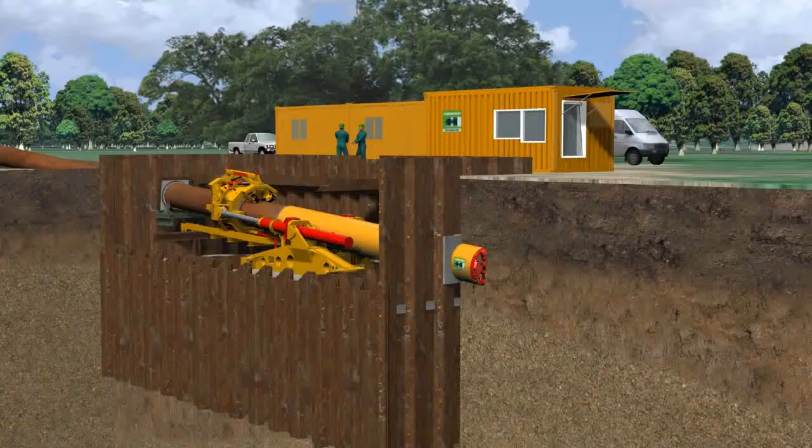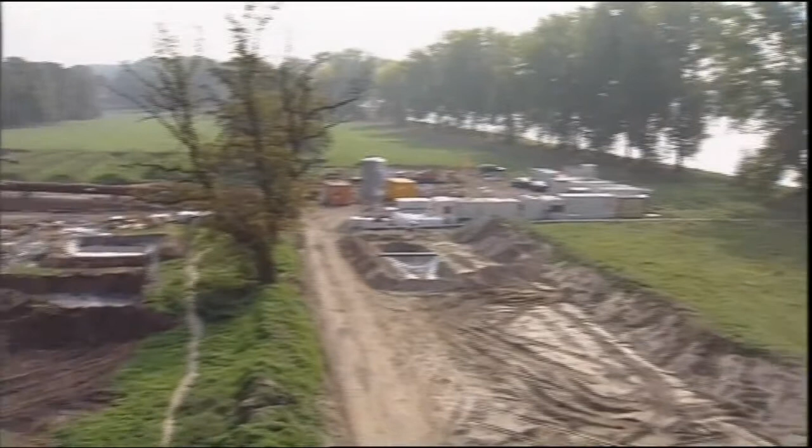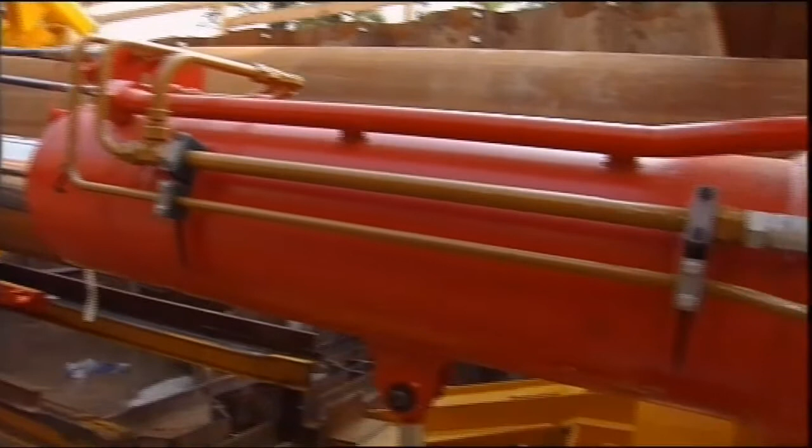Herrenknecht's direct pipe technology is a newly developed method for the direct installation of prefabricated pipelines, combining elements and advantages of both well-established techniques, microtunneling and horizontal directional drilling. This innovative technology is designed for laying pipelines in all geologies.

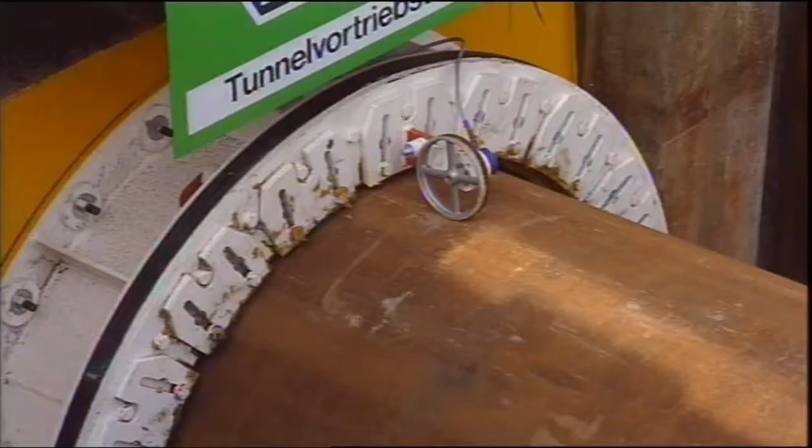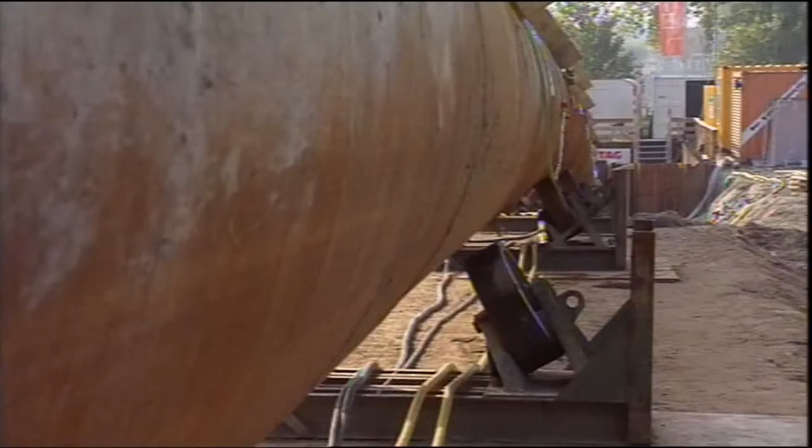With the new direct pipe method, developed by Herrenknecht, drilling of the borehole and the installation of the pipeline are generally carried out in one step. The pipeline is welded together and tested on site, and thereafter thrusted in its whole length with the aid of the pipe thruster.

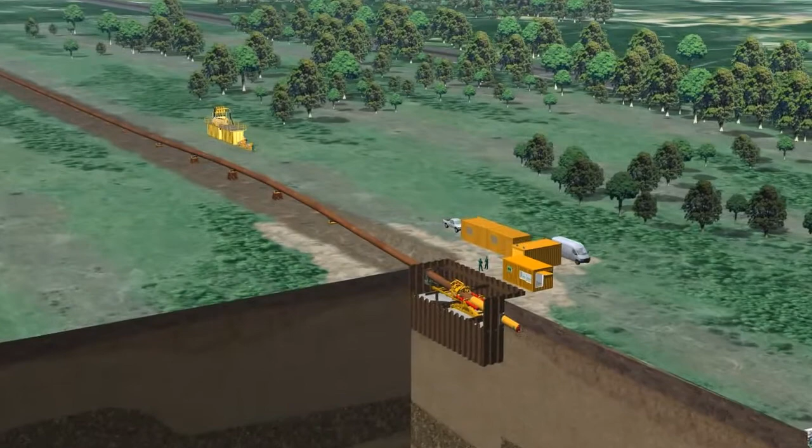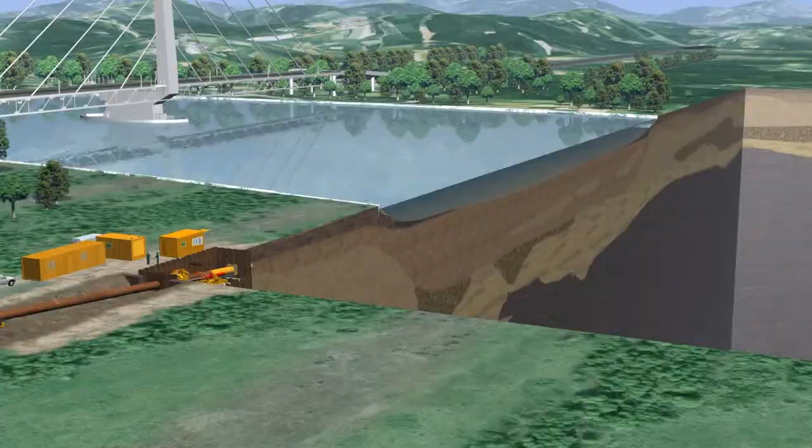The following computer animation shows the principal working method and the main components of the direct pipe method, starting with the setup of the launch pit. The pipe thruster is installed in the launch pit, where it is fixed horizontally and vertically onto sheet piles and anchors. If necessary, inflow of groundwater and river water is prevented with a special launch seal.

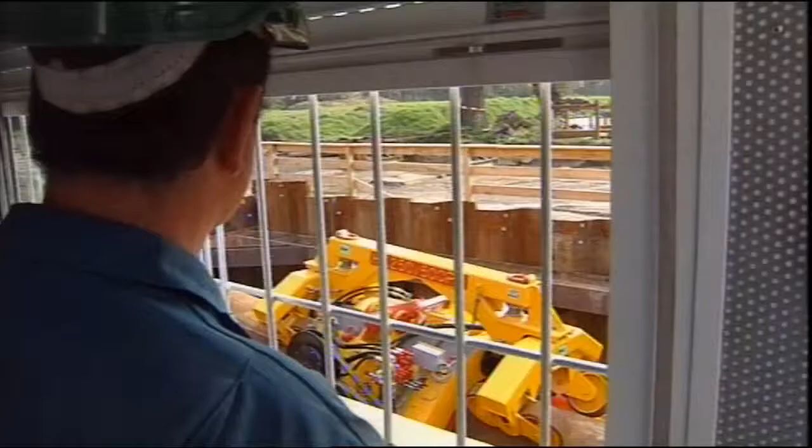The control container is installed next to the launch pit. From there, the operator is able to monitor the pipe moving forward. Additional containers for the preparation and separation of the slurry bentonite are installed in the middle of the prefabricated pipeline.

According to its elastic bending radius, the pipeline is laid on rollers for easy moving to the launch pit. The pipeline is welded to the rear end of the direct pipe machine. Once started, the machine is pushed through the launch seal and starts to excavate the planned alignment. The pipe thruster pushes both the pipeline and the direct pipe machine. It replaces the jacking frame, which is used for standard microtunneling purposes.

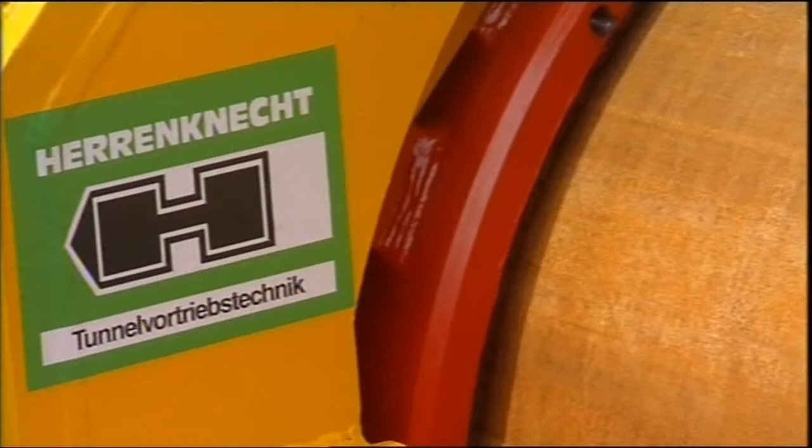After the completion of each 5-meter stroke, the clamping inserts are reopened and the 2 cylinders are hydraulically retracted. The whole excavation and thrust process starts again, and the pipeline is advanced cycle by cycle. The 4 clamping inserts of the clamping unit, which are lined with vulcanized rubber, grip the pipeline and thrust it stroke by stroke into the ground.

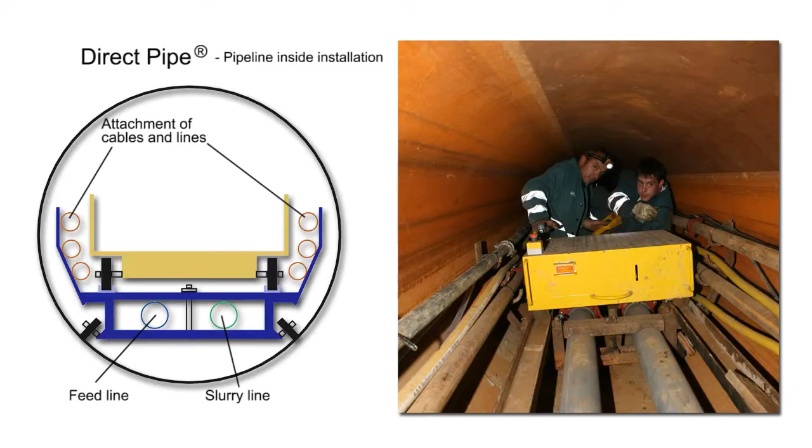All bentonite lubrication and soil conveying lines, as well as power supply and navigation cables, are installed inside the pipeline. The direct pipe machine drills along the predetermined alignment below the riverbed. The pushing force required for the drilling operation is transferred to the cutting head by the pipe thruster via the entire pipeline.

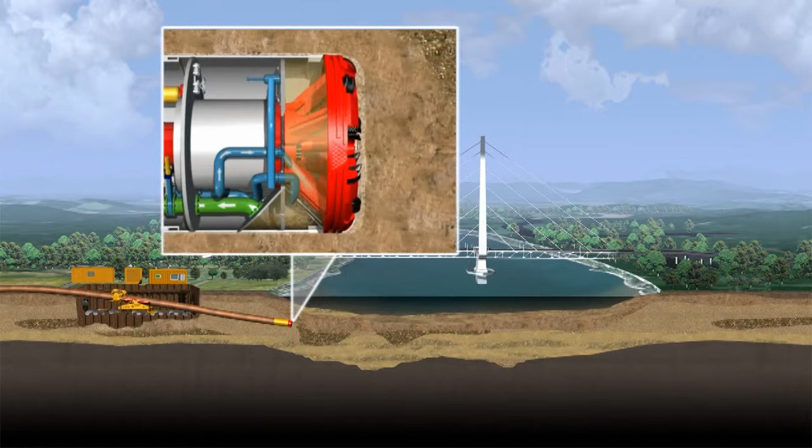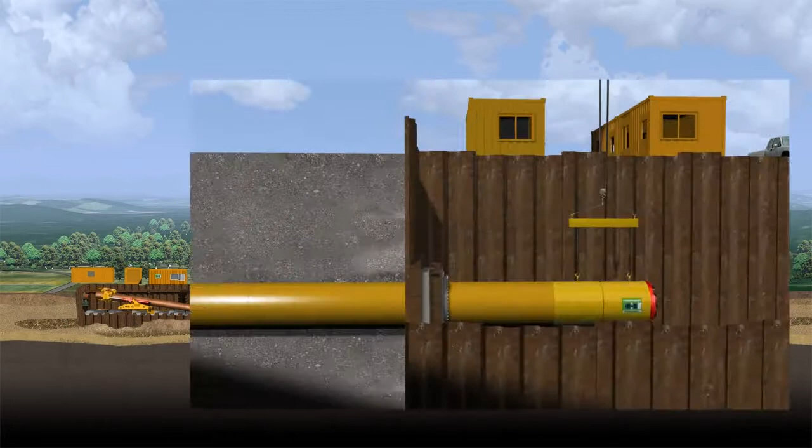The excavated material falls through the openings of the cutting head to the bottom of the excavation chamber, where it is removed by the slurry lines to the separation plant. Shortly after reaching the reception pit, the direct pipe machine can be removed from the pipeline and lifted to the surface.

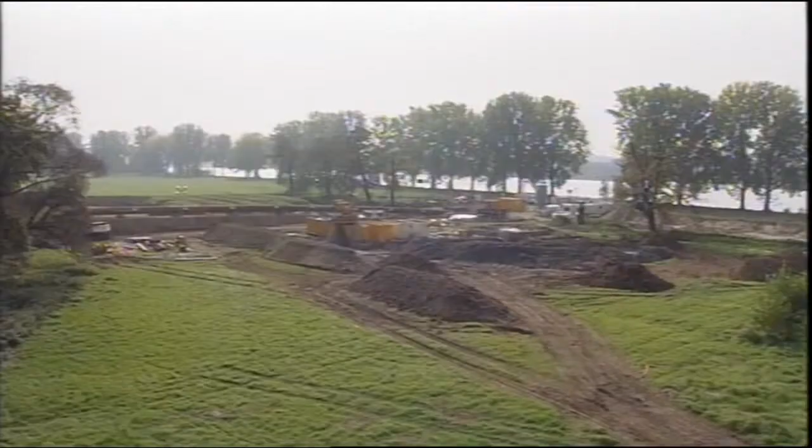The successful world premiere for direct pipe was realized in a 464 meters long crossing of the River Rhine in Worms. Here a protective pipe for a water conduit and electricity cables had to be built. Due to project-specific conditions, like limited space and the tight time schedule, the crossing was realized in sections of approximately 90 meters each. The delivered steel pipes with a single length of approximately 10 meters were welded together into pipe strings and laid out on rollers side by side.

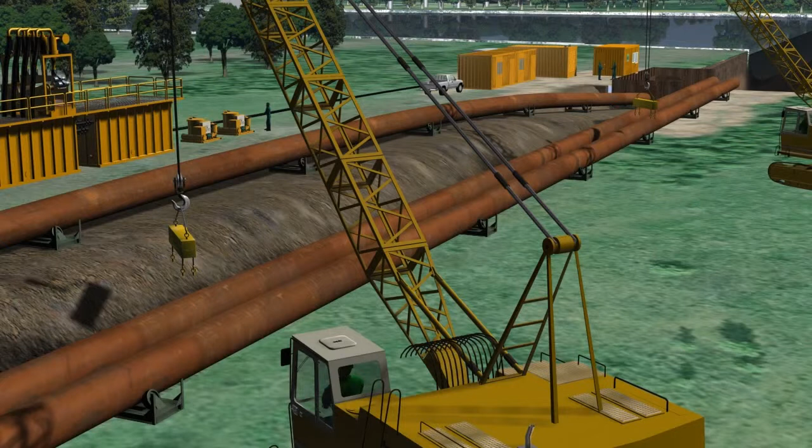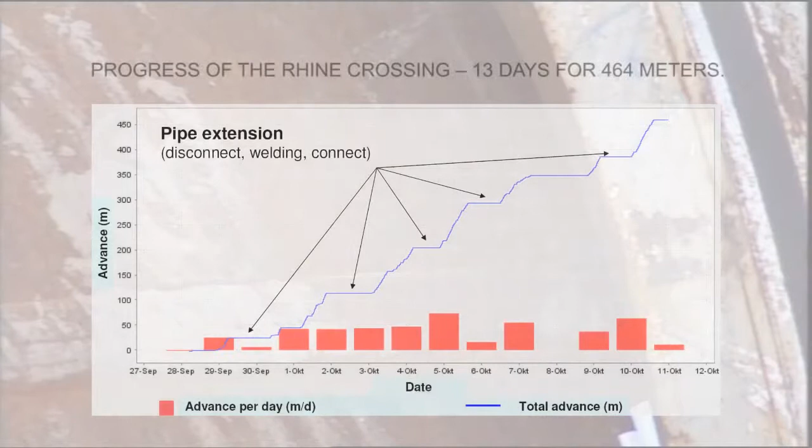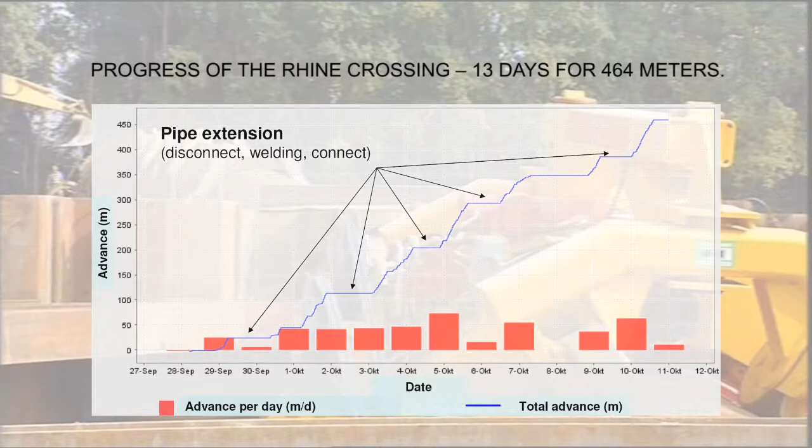The first pipe section is already installed and ready for pipe jacking. After thrusting in the first pipe section, the next pipe section is brought into position and connected by welding onto the first one. The job site team realized maximum advance rates of 90 meters in 24 hours. Breakthrough was achieved only 13 days after the beginning of the construction work, with a vertical deviation of only several millimeters and a horizontal deviation of only some centimeters.

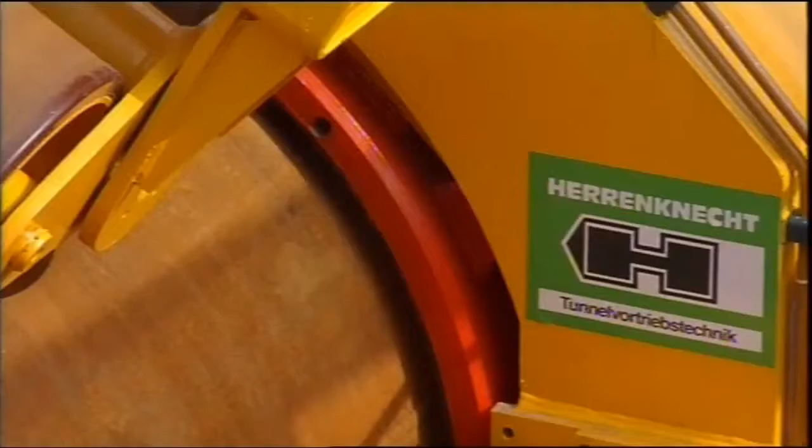The pipe thruster can be used for all pipe diameters ranging between 20 inches and 60 inches by simply changing the clamping inserts. The maximum stroke of its 2 push and pull cylinders is 5 meters, and its operating angle lies between 0 degrees and 15 degrees. The pipe thruster can advance at a maximum speed of 5 meters per minute.

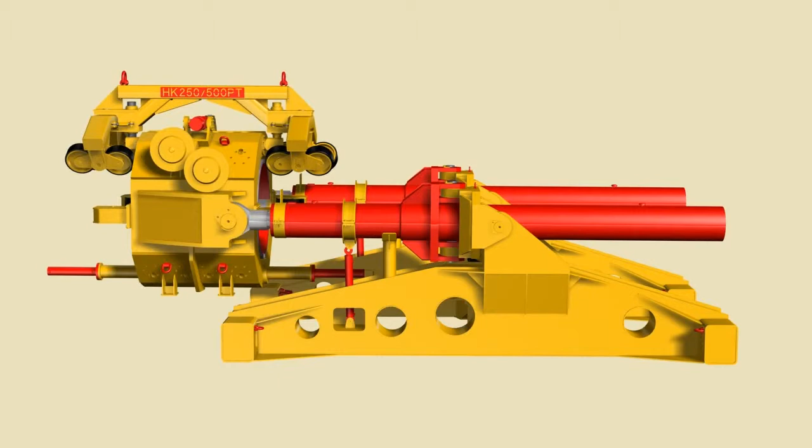Herrenknecht provides two different models of pipe thrusters: a smaller unit for pipe diameters ranging between 20 inches and 48 inches and a pull force of 500 tons, and a larger one for diameters of 40 inches to 60 inches and a pull force of up to 750 tons. However, in Worms, only 80 tons were necessary to smoothly push the entire pipeline forward.

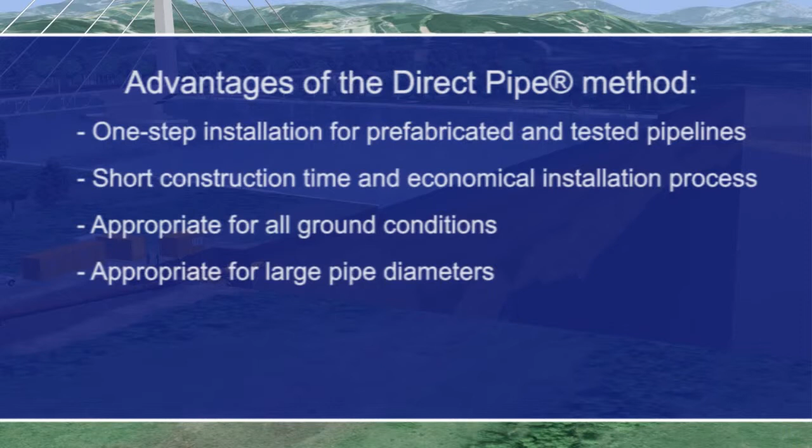The advantages of the direct pipe method compared to standard tunneling technologies: one-step installation for prefabricated and tested pipelines, short construction time and consequently economical installation process, appropriate for all ground conditions, appropriate for large pipe diameters, optimum solution with access from one side only, e.g. for sea outfalls, avoiding offshore works. In an emergency, the whole pipeline, including the direct pipe machine, can be retracted.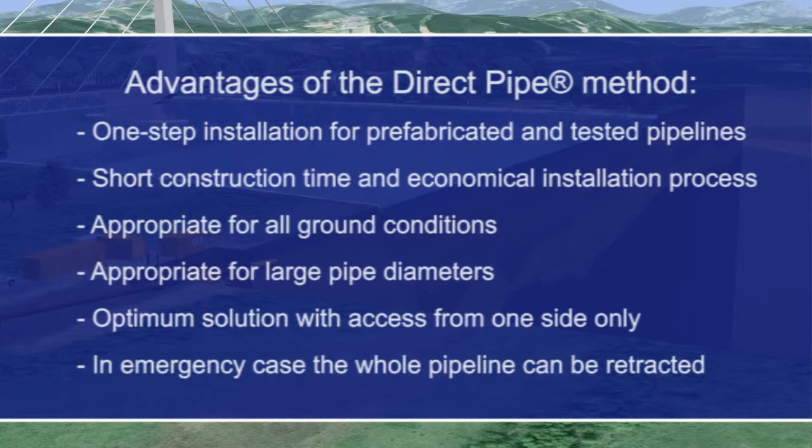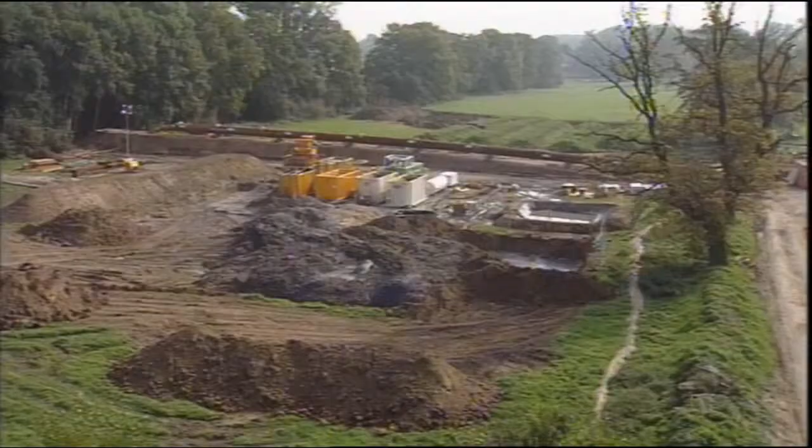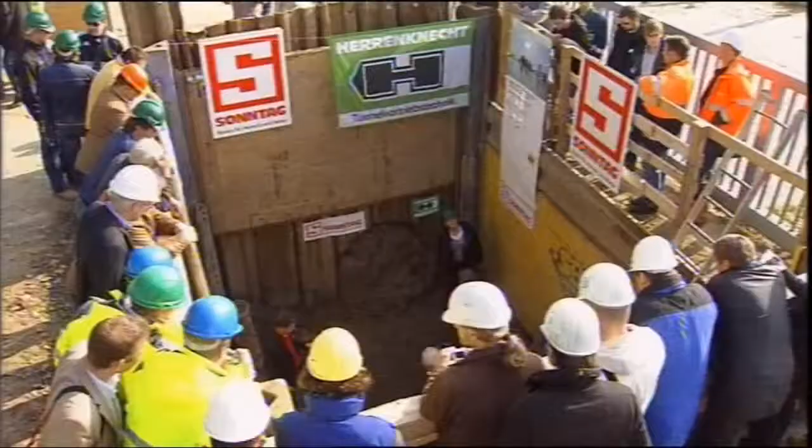With the development of the innovative direct pipe technology and the pipe thruster, Herrenknecht AG offers the possibility of combining and optimizing the two well-established tunneling technologies, microtunneling and HDD. The one-step direct pipe method allows pipelines for water, gas, and oil to be laid faster and more safely than ever before. The prefabricated product pipelines can be installed from one access side in a space-saving and eco-friendly way. Direct pipe is an innovative alternative for the pipeline industry.